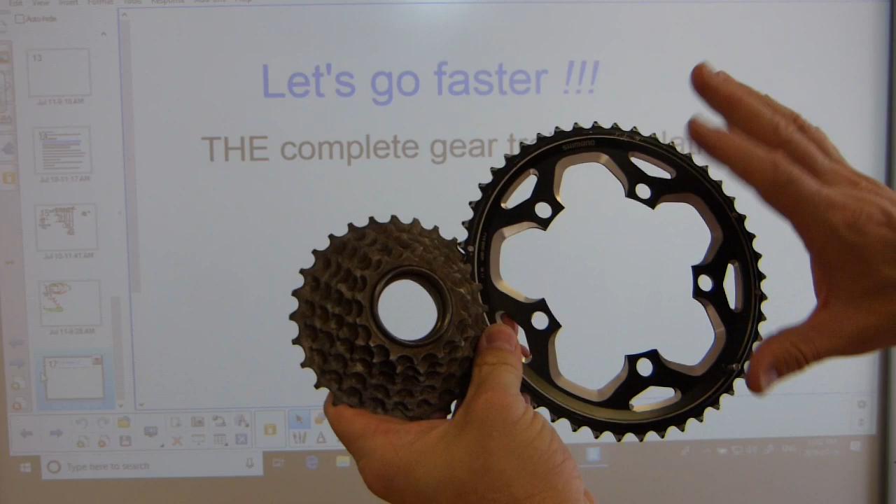Let's go faster, everyone. New chain rings and new cassette sets. It doesn't matter what type of bicycle these are mounted on. It doesn't matter if this one is a free hub or freewheel type cassette set. The math works out exactly the same way.

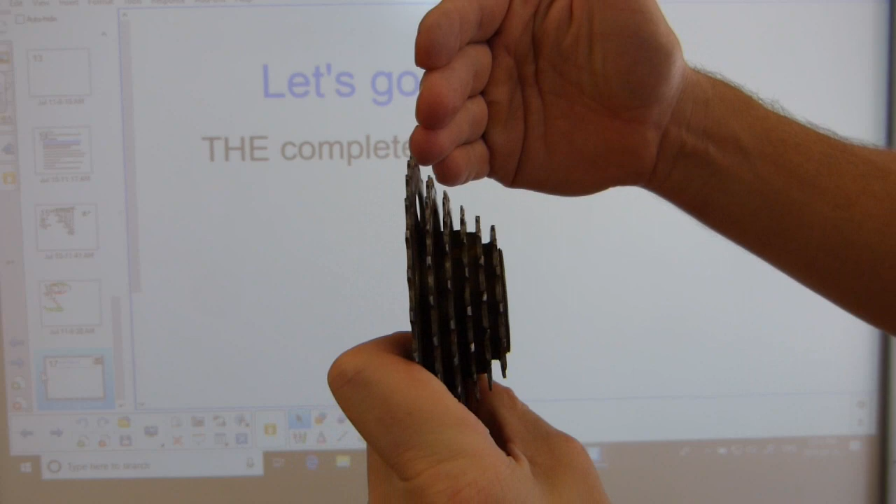In this video I'm going to show you a complete gear train calculation exactly the same way as manufacturers themselves get it done, to calculate the speed of the bicycle in every single gear that you have. Doesn't matter how many you have at the rear, doesn't matter how many you have at the front, the math will work as it's shown in this video.

The math will be in an Excel worksheet looking like this. I am going to explain what the columns mean, I'm going to explain what the rows mean, I'm going to explain what the color coding means, but this is not a tutorial in basic Excel, I'm not going to explain how Excel works.

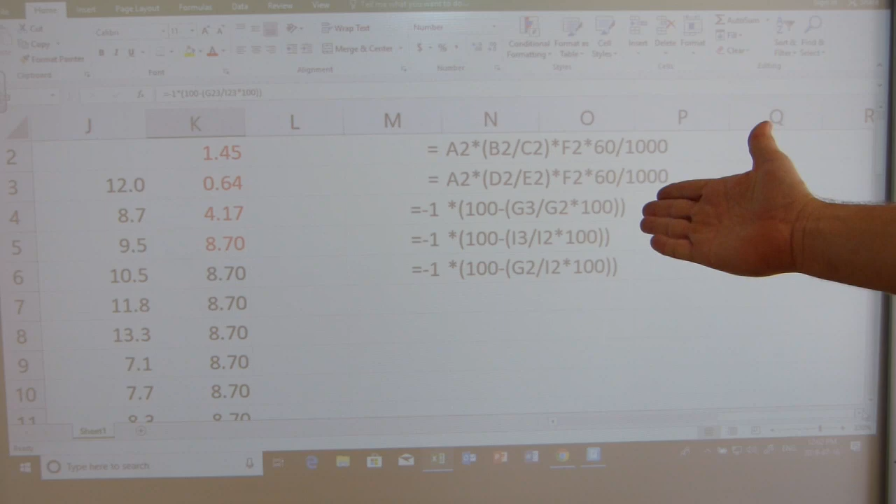Instead of writing the math out step by step, the formulas will be given like this in cell referenced formulas. That means that a formula, such as this one up top here, reads cell A2 multiplied by, that's what the asterisk is, open bracket, cell B2 divided by cell C2, close bracket, multiplied by cell F2, multiplied by 60 divided by 1000 to get your speed calculated.

It's a mouthful. I'm going to explain the concept that goes into the formula, and I'm going to explain what numbers you need to populate your table with to get the calculation done. You need 4 batches or 4 groups of information to get started.

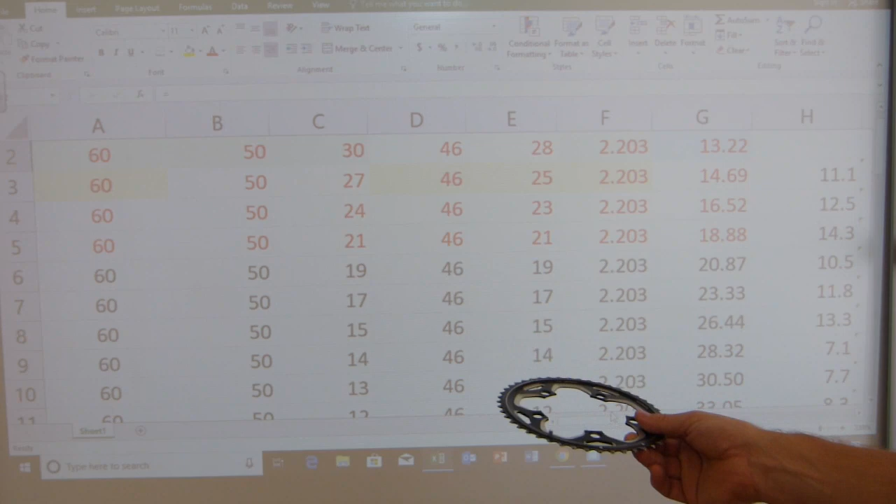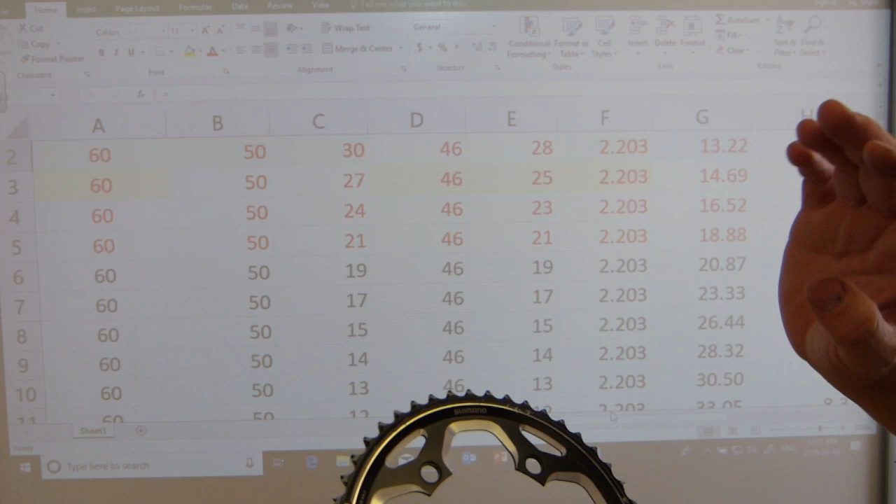What prompted this entire video is that I replaced my old chain rings with new ones because I wanted to go faster in some of the gears, and I also wanted to go slower in the climbing gears. So I have new chain rings and a new cassette allowing me to do that, and I wanted to know exactly what my speed is in every single gear and how much I'm going faster or slower in any given gear.

So let's go over what information is going into the input side of things to populate this table. I have my bicycle here set up to show you exactly that, with the gear train highlighted here with that yellow sticky. What's needed is information number 1, your tire circumference.

Wrap your tire around with a fiberglass tape measure or a steel tape measure that's narrow and lies flat on the circumference of the tire at a pressure and temperature you will be operating your tire at. So not out in the frozen cold. This one runs at 80 psi, has been measured at 80 psi, and its circumference is 2203 millimeters or 2.203 meters.

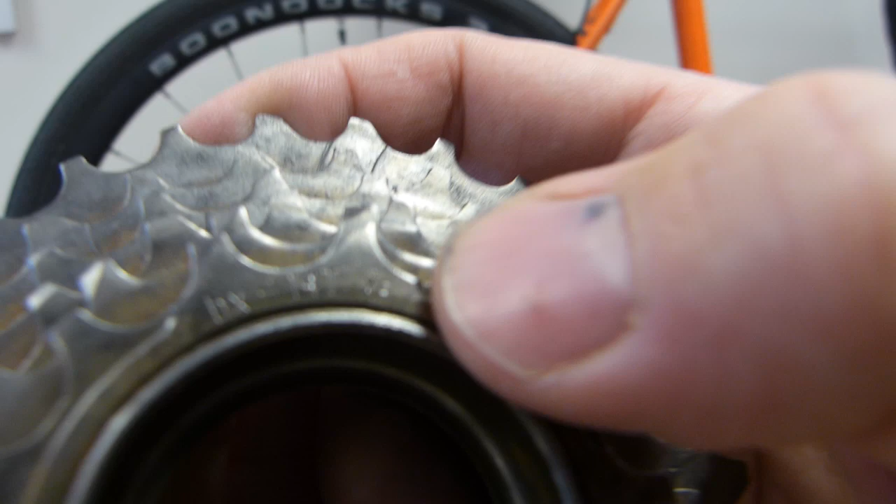The second batch of information is the number of teeth on the cassette set for every single sprocket. You can see some of the numbers embossed into it, like this one says 14 teeth for this first sprocket here. The next one is illegible. Another one here says 18 behind it, 18T, it's kind of rusty.

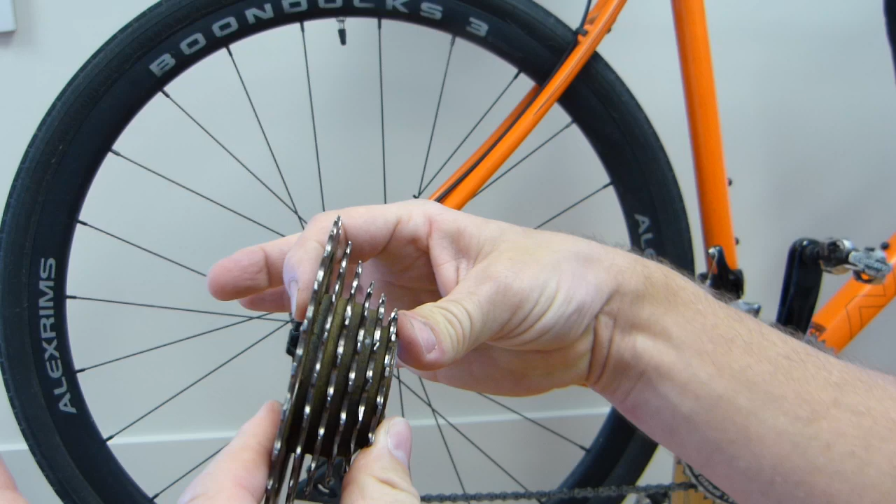So you might need to take a felt pen and carefully count every single tooth on all of the sprockets that you have, whether you have 6 or 11, I have 11 there. Whatever number of sprockets and teeth you have, you have to count them. They need to be in an Excel worksheet for this calculation to work.

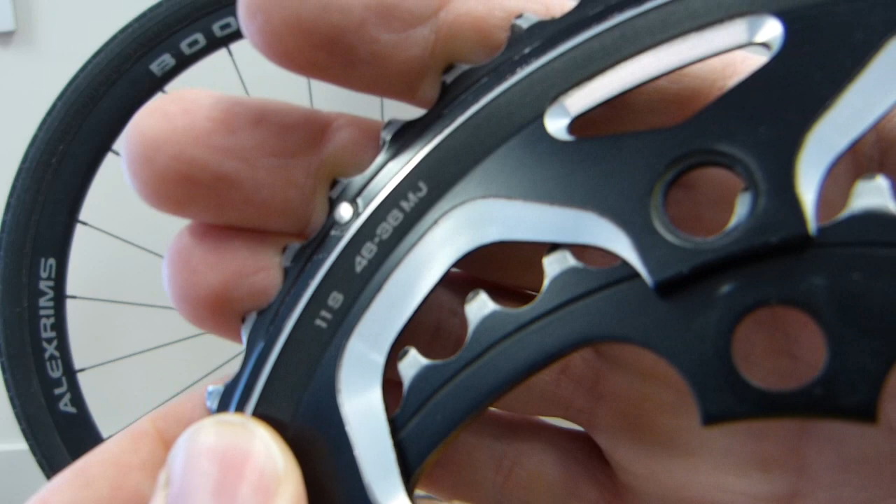So that's batch number 2. So tire, sprocket, all of them. Next one is your chain rings. Number of teeth on each chain ring, however you have, 1, 2, 3, as many as you have, all of them. All the numbers of the chain rings are also printed or embossed or engraved or somehow indicated on some of them. This one is 46 for the big one and 36 for

the little guy. On the new one here, I have 50 for the big one and 34 for the little guy. So those numbers are another batch of information going into Excel. So 1, 2, 3 with all the teeth on all of the chain rings.

Fourth batch of information is your RPM or your cadence. RPM is, if you start with your pedal in the 12 o'clock position or your crank arm, go around slowly at the 3 o'clock position, 6 o'clock position, 9 o'clock position, comes back to the 12 o'clock position. This is one revolution, one full turn. If this is all you do in a minute, that's one revolution per minute, 1 RPM.

Admittedly slow, but this is the concept. 1 RPM, one full rotation in a minute. Okay? If you're doing 60 of these in a minute, you're doing 60 RPM. I started my Excel table at 60 RPM, a very low amount.

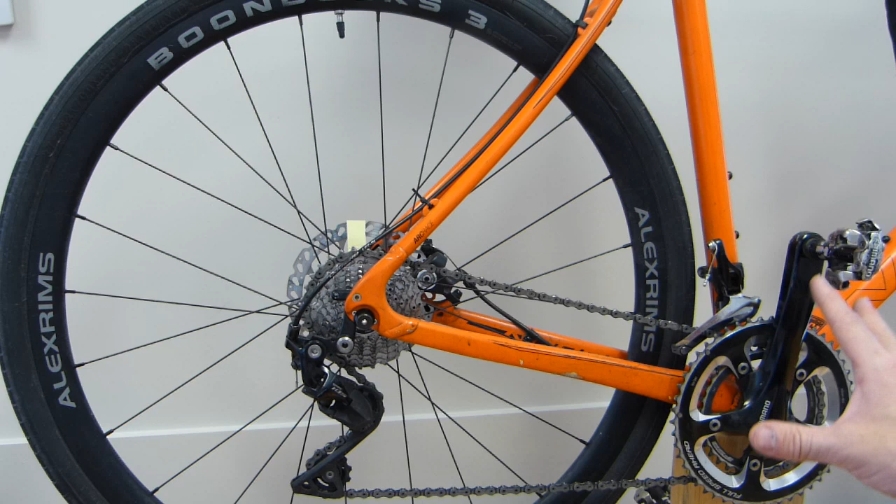If you want to do 90 RPM or 95 or whatever your RPM is, whatever your cadence is, this is the same concept as cadence, whatever your cadence is, or your range of cadences that you use, enter them in the Excel sheets. I'll show you how they work. Very straightforward. So that's the fourth batch of information that you need, your cadence or RPM number.

Now, I want to explain with this setup here. The bicycle is lifted up on this handy dandy block of wood, so the wheel is in the air. I want to show you one thing about how these 4 batches of information work together to produce speed. Speed that is a predictable, fixed mathematical certainty. It does not depend on the weight of the rider.

It does not depend on how fast the air or the wind is blowing. It doesn't matter if it's raining. This is a fixed mathematical certainty. And this is how it works. And this is why it doesn't matter how much the rider weighs.

The number of rotations on the crank arm, this is why we start here in the 12 o'clock position on the crank arm. The direct number of rotations on this one will result in a mathematically predictable, repeatable, fixed number of rotations on the wheel. Due to the circumference of the wheel, you're going to get a fixed distance traveled based on your input RPM.

So, RPM is the input. It goes through a gear reduction through your transmission here, which is your chain rings and sprocket, and you're going to get a fixed number of rotations which equates to a fixed distance the wheel travels. Again, it doesn't matter what the wind is.

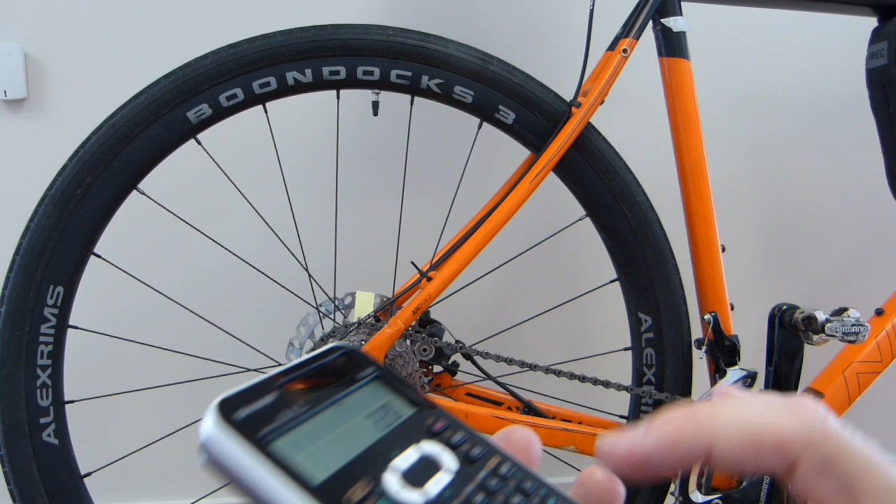That means that if your RPM is 4 revolutions, that's all you do in a minute. Say it's windy, whatever. That's why it doesn't depend on the wind or the weight or the luggage or anything. If your muscle output is 4 RPM, 4 revolutions in 1 minute, the bicycle will travel forward in this gear exactly 5 times the circumference of the tire, which is 2.203 times 5, 11 meters in a minute. Whatever that equals in an hour, times it by 60. Convert it to kilometers, that's what Excel can do for you. Very easy. So I hope this makes sense. This is a 4 to 5 ratio in this particular gear, and it doesn't depend on any other factor.

Okay? I just want to show you one more thing, that it's not exactly 4 to 5, because it's just off a teensy bit. The actual ratio, because we are on the second largest chain ring, and the second largest sprocket here at the rear, and the second largest sprocket has 27 teeth, and the chain at the front is on the chain ring with 34 teeth. The actual ratio is not 4 to 5, the actual ratio is 27 to 34.

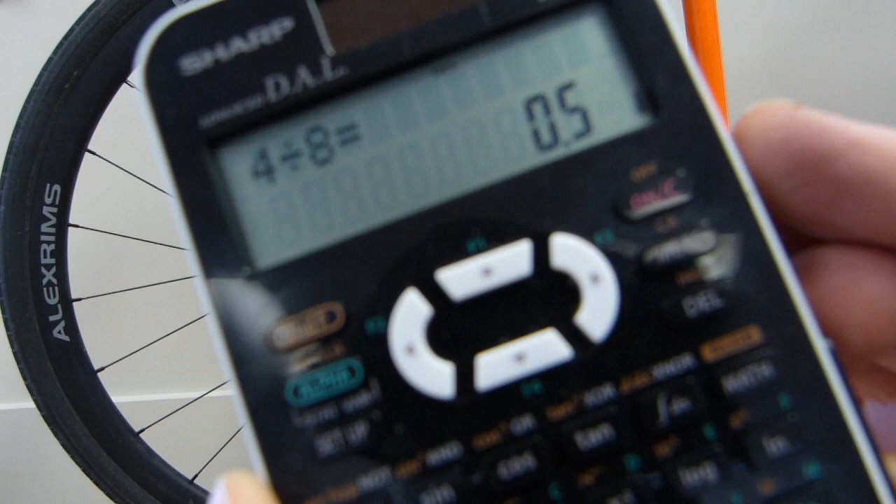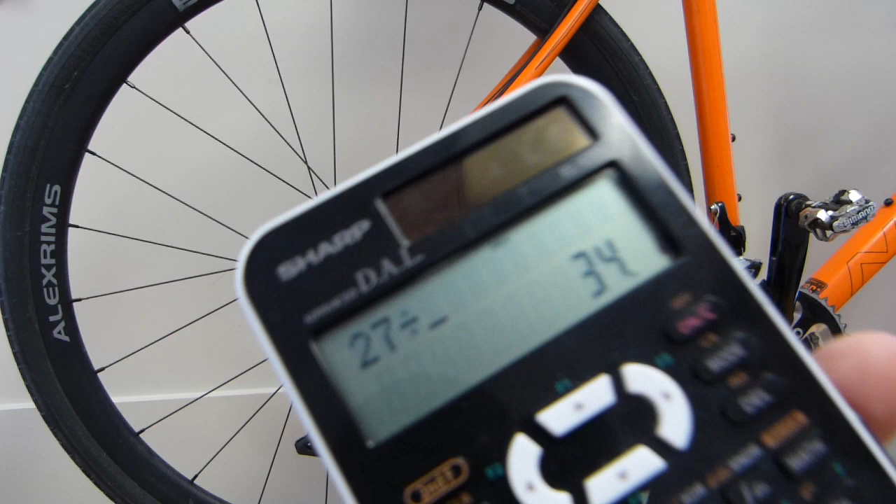Now, let me convert the 4 over 5 to a decimal here. I don't need a calculator for that, it's obviously 0.8, but 27 to 34 is a fraction that doesn't reduce to lowest terms because they don't have a common factor. So 27 over 34 converted to decimal is almost 0.8, but not quite. So that's why it's just a little bit off. It's not exactly 5 full rotations, but very nearly. So instead of the 4:5 ratio, which is good for the concept, it's mathematically an exactly 27/34 ratio. And that's why you need all of the gear teeth numbers for every single sprocket on the cassette set, and all the teeth for all of the chain rings that you have to get this math done.

Now let me change gears. I'm going to try to drop the chain on one of the sprockets that have exactly 17 teeth. Give me a sec. I think it's 3 gears down. It's looking good. Okay, let me just get this back to 12 o'clock position. Alright, when the pedal is at 12 o'clock position, the valve stem and the sticky are in the 6 o'clock position now. This is 17 teeth at the rear and 34 teeth over here. 17 to 34 is a fraction that reduces to lower terms, because 17 is exactly half of 34. So 17/34 reduces to 1/2. And this is a 1/2 fixed ratio. That means for every full rotation of the crank, I will get 2 rotations on the wheel.

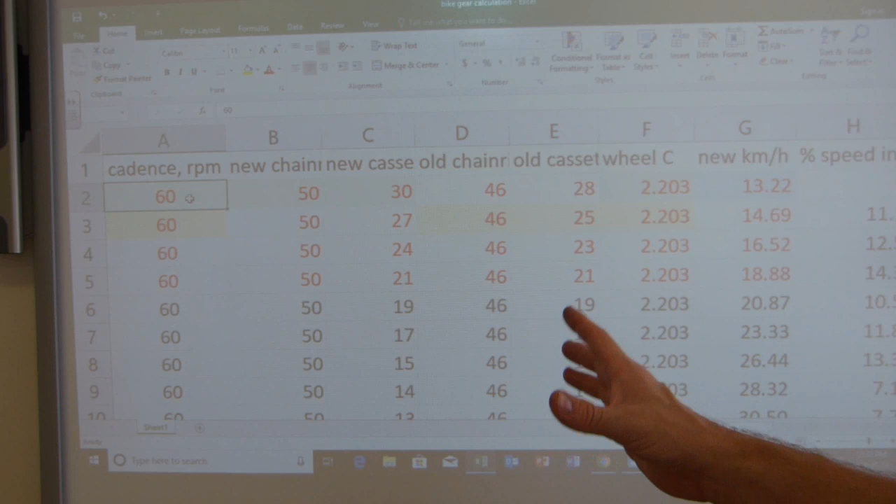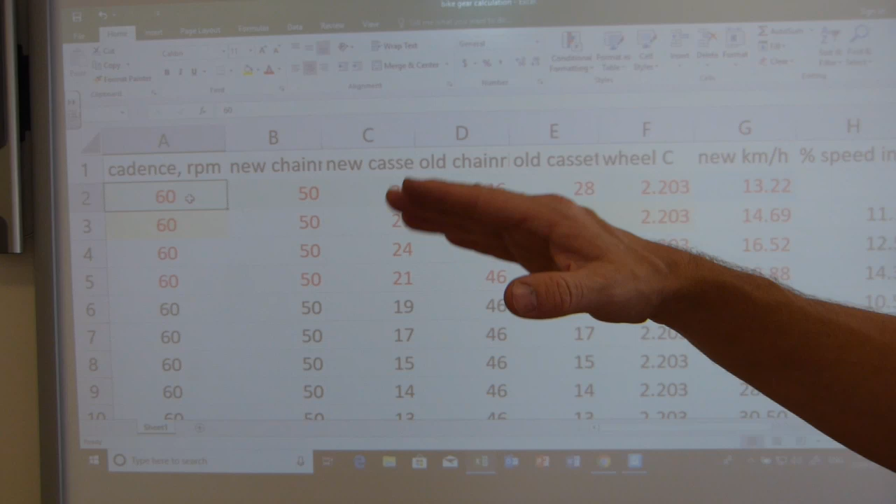Your RPM. Oh, I forgot to mention, you can measure your RPM: just pick the left knee or the right knee, how many times your right knee rises in a minute. Tick tock, so you're gonna need a watch. If you don't have any digitized or automated way to measure your RPM with instrumentation, then you're gonna have to do a count yourself. So just count how many times your knee rises when you're going at your usual pace, at your usual cadence. You will have a rough idea about your cadence.

Of course, it varies for everybody, whether you're climbing, grinding, or spinning, but it usually is between 60 and 100, just in rough terms. So that's your cadence number, the first column. Second column is my chain ring number. The number of teeth on my bigger chain ring is 50. This number 50 is entered here 11 times because I have 11 speeds, 11 gears at the back. So I have the 50 repeated here 11 times, and then the 34 for the smaller chain ring repeated 11 times.

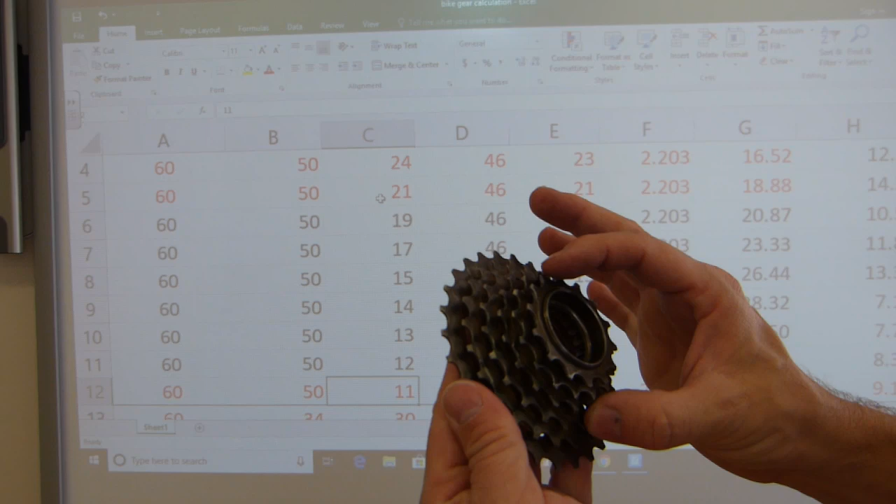In the next column, column C, I have all of the gear teeth for the cassette, for the rear. So the first sprocket has 30 teeth, the biggest one. The next one has 27, that's what the chain was on when we started with the demo. The next one has 24, 21, you can see the numbers all the way down to 11. 11 is my smallest sprocket there. So that's how this looks, and then it's repeated starting with 30, the column continues down right next to the 34.

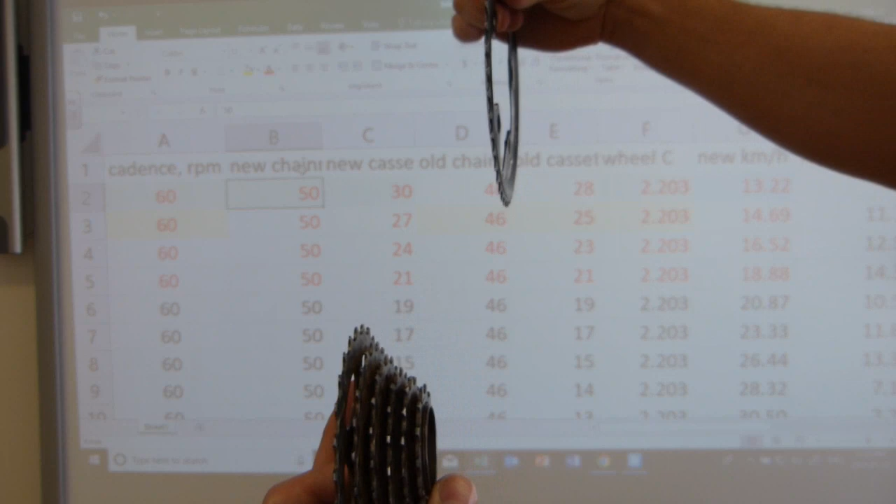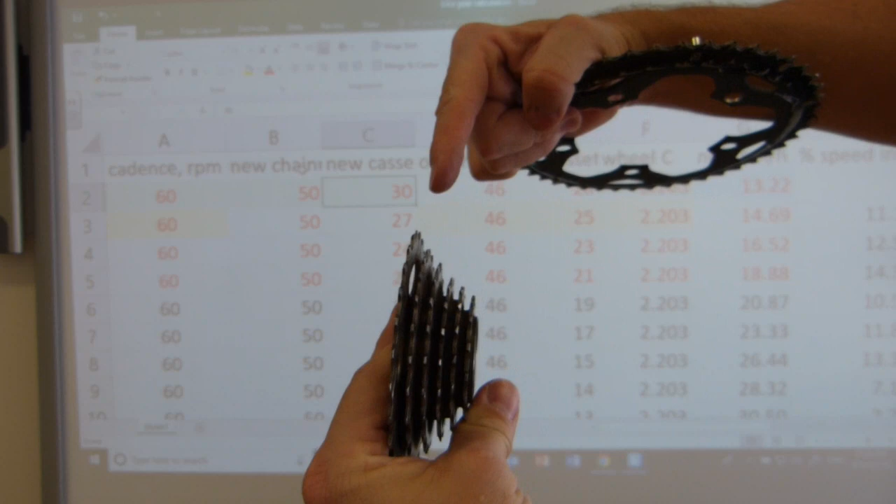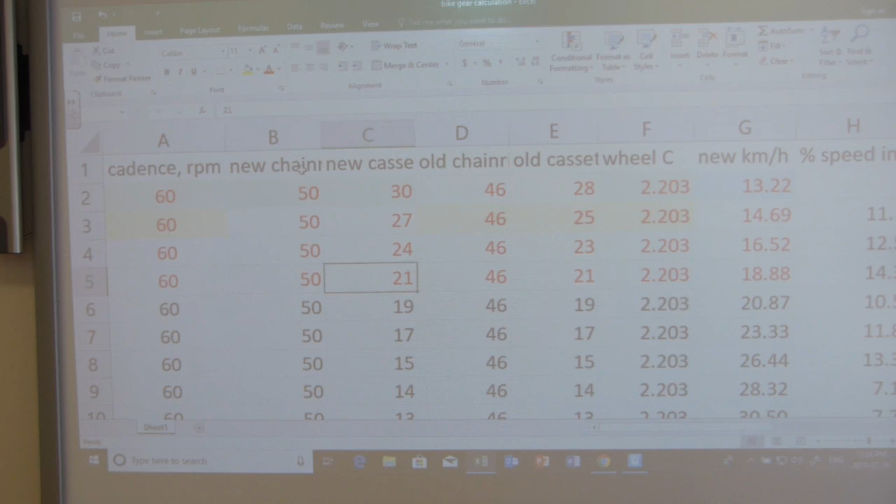The meaning of this is that the bicycle can be in gear in an arrangement where the largest chain ring, just pretend this one has 50 teeth, is connected with the chain, because this doesn't shift sideways, the chain connects the two of them. The largest of the chain rings is connected to the largest of the sprockets at the rear. So that's why 50 with the 30. Then you move the chain one down to the 27. So you have a 50 and a 27 connected with the chain. Then the 50 and the 24, the 50 with the 21, you get the idea. That's what you see here.

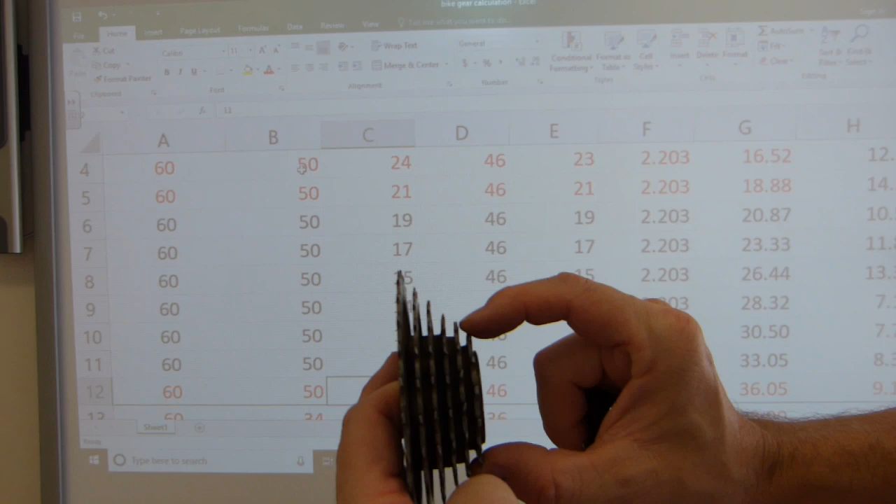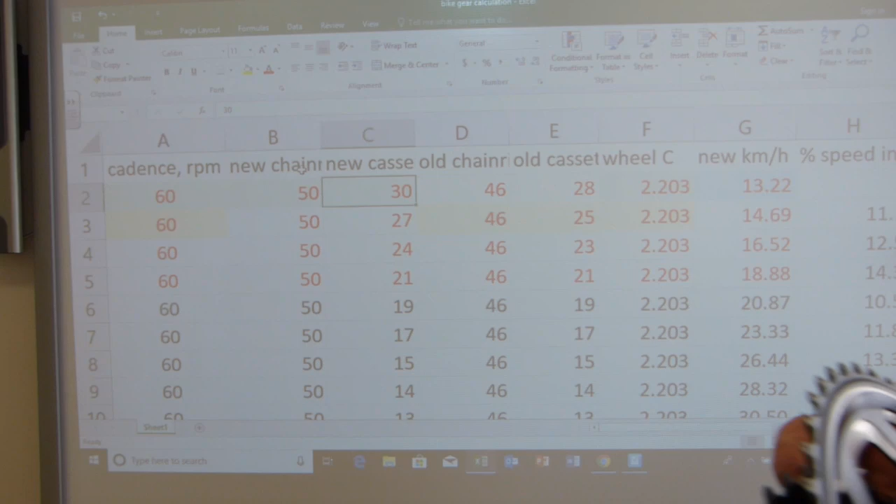Finally, 50 with the 11, the chain is on the biggest chain ring and on the smallest sprocket on the cassette. 50 and 11. Why the 50 and 11 are red and these ones are black, and then these 4 here are red, is due to cross chaining. Cross chaining means that the chain rings on a bicycle, 2 or 3 of them, are usually lined up with the middle-ish of the cassette.

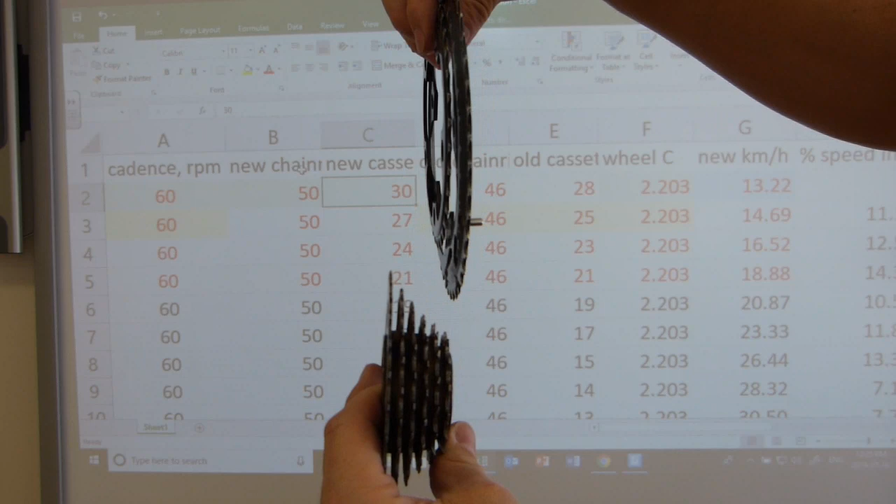So in order for the chain to reach either the smallest sprocket or the largest sprocket on the cassette, the chain needs to take an angle. So if the chain is on an angle this way or this way, it's called cross chaining, and it's not a really efficient way to run the chain.

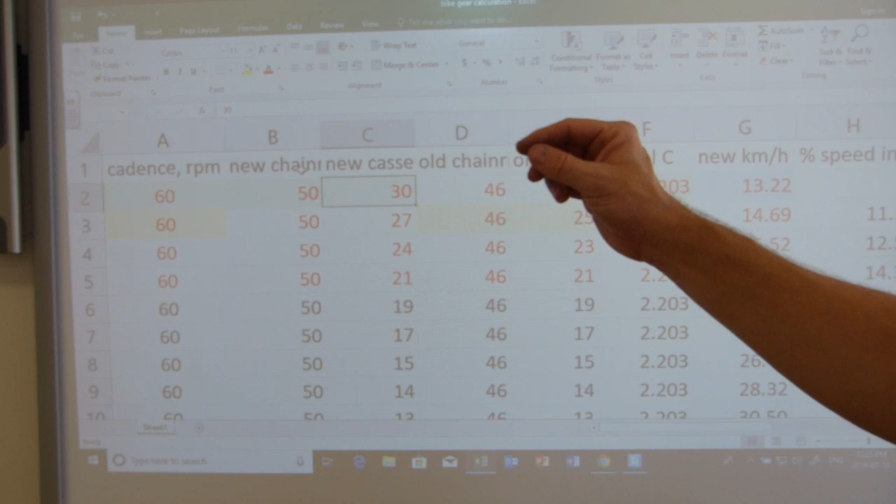Due to the added friction, it needs added power to produce the 60 RPMs or whatever RPM that you want to be going at. So that's why these are in red, because they are impractical. It's impractical to connect the biggest chain ring with the biggest sprocket on the rear. Same for these. The first 4 are really impractical.

Likewise, the fastest gear, 50 and 11, this is when the bicycle goes the fastest, but due to the cross chaining, due to the friction, it's not really an efficient gear. For designers and engineers, given the target speed that you're aiming for, the cross chaining needs to be minimized.

So the gear ratio that you want to hit, depending on what speed you want to hit, needs to be in a reasonably well aligned range of the cassette set, and that's how they design the cassette sets, given the desired speed that they want to get, without the chain cross-chaining in the process.

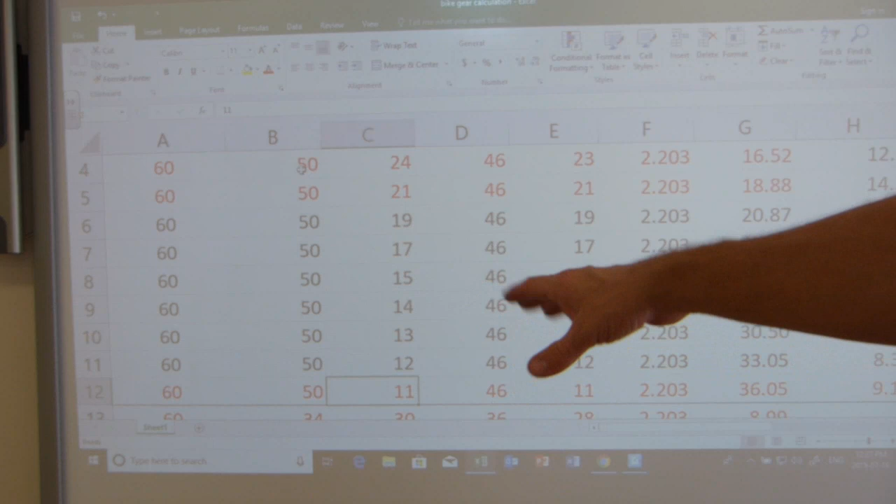So if you have to cross-chain for a kilometer or whatever for a short amount of time, sure, it will work for an entire race or a trip or whatever. But if you have to do cross-chaining for extended periods of time, it's killing time, it's making extra friction, and it's bleeding or losing time from the racer.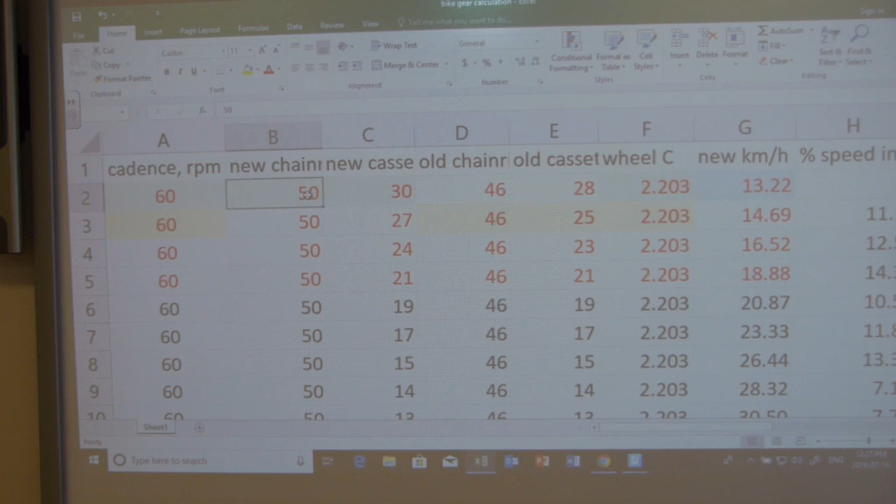Not efficient. So that's what you see in column C, the numbers from 30 to 11 with the big chain ring, and numbers 30 to 11 again with the small chain ring. The same repeats with the old chain ring, which is 46 on the big and 36 on the small. You see the 36 small got replaced by a 34 even smaller chain ring because I wanted to go slower in climbing gears. And the 46 got replaced by 50 because I wanted to go faster in the fastest gears.

So the speed is calculated here by using these four numbers: RPM, the chain ring number of teeth, the number of teeth here on the cassette, whichever it is, and wheel size, number 4, to get this number. And you can see it from the formula here. These are the four numbers in cells A2, B2, C2 and F2 to calculate the speed.

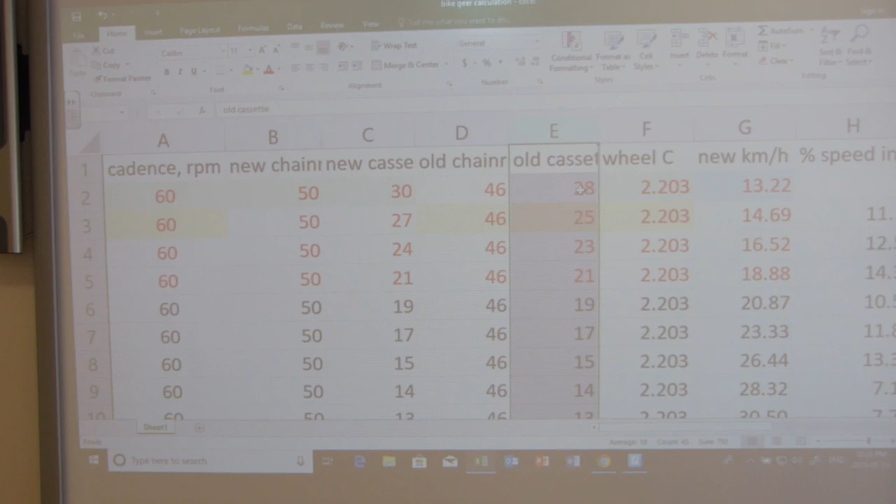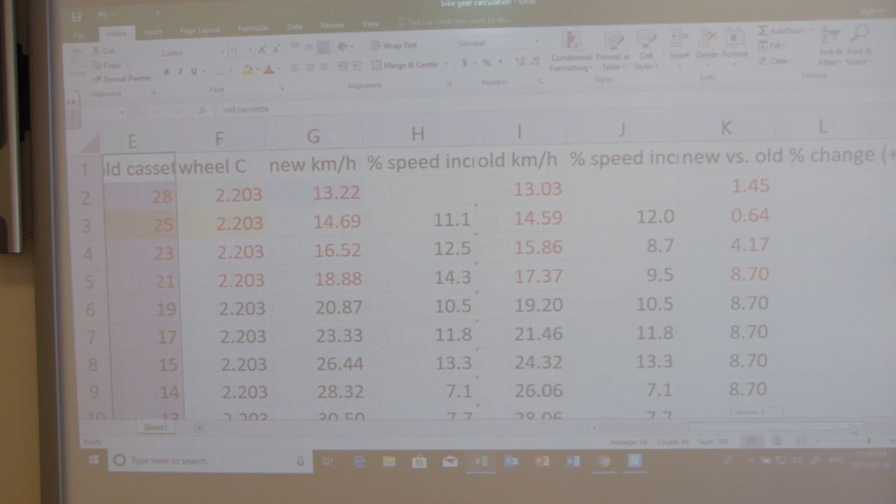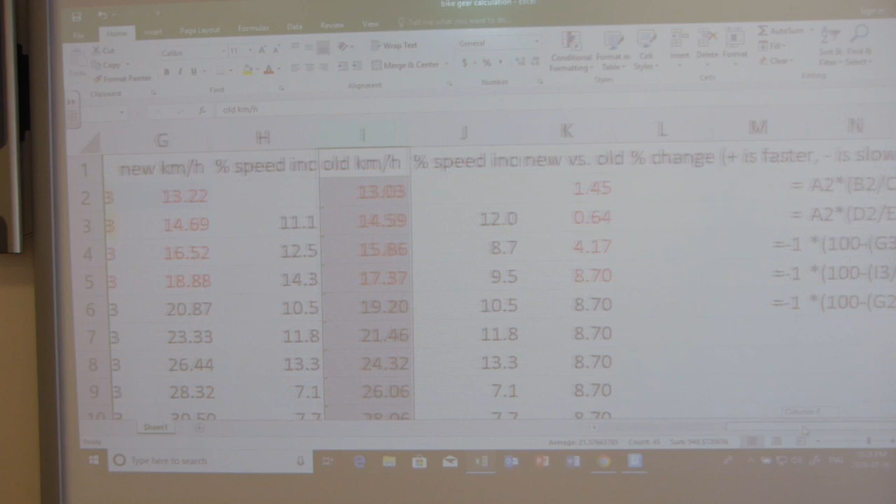The same applies to calculating my old speed with my old chain ring and old cassette. My old cassette has 11 to 28, so you can see the same logical layout, 11 to 28, and in every gear the speed is calculated. The speeds formula follows the same logic. A2, D2, E2 and F2 are referenced in it, and the old speeds are here in column I, and the new speeds are here in column G.

You can see by comparing the two that I'm going faster in every single gear with my new setup, and with my smaller chain rings in the slow gears, I'm going slower in every single gear consistently. That's what I wanted. You can see these percentage numbers. The percentage numbers are calculated within each gear within the new setup here. So 14.69 is 11% faster than 13.22.

This is G3, this is G2. You can see these percentage formula calculations here. G3 and G2 are in this formula here to get the percentages, because I wanted to know how much faster I am going in every single speed here. So about 10% faster, just roughly. You can see it's between 7 and 14.

The same is repeated in column J for my old gear train. In my old gear train I also went between 7 and 12%, about the same, 10% faster in every gear. That's nice. Or slower, depending on the setup.

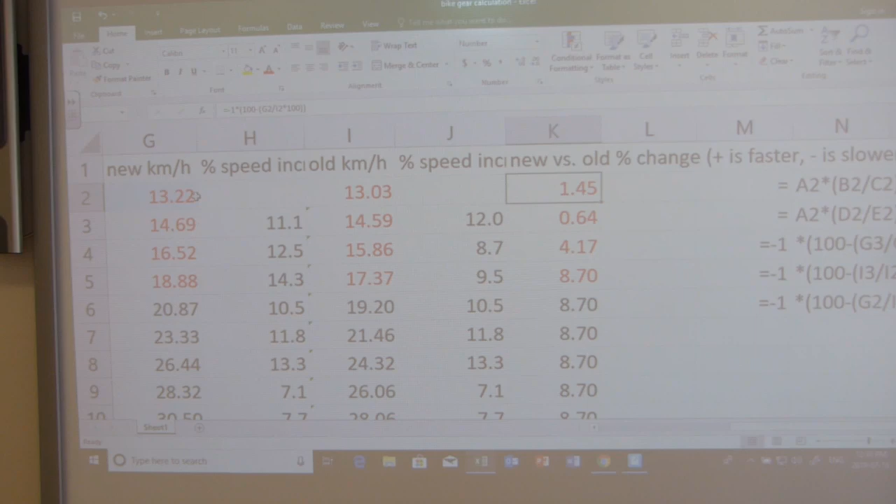Last batch of numbers here, new versus old in terms of percentage, because the speeds are, like I said, directly compared between I and G. Those are the speeds, but in terms of percentage, 13.22 is 1.45% more than 13.03. So these percentage numbers here come out of this last formula, where G2 and I2 are the cells that are referenced here.

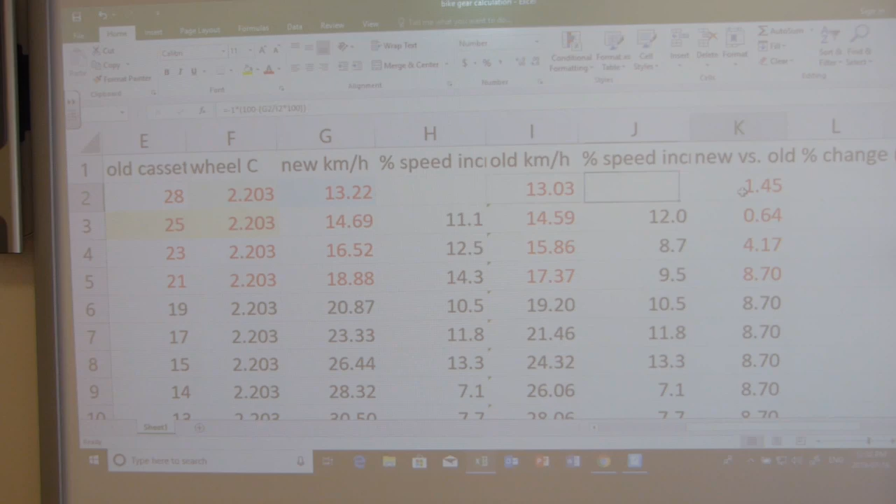So G2 and I2 produce these numbers, and you can see I'm going faster in every gear here with percentages about 8.7 where it matters, and about 5.5% slower in every gear where it matters to go slower. So I am going slower here where I wanted to, and I'm going faster here where I wanted to.

So that's what a gear train calculation looks like. That's all the thought that goes into it. You can repeat it with your numbers fairly easily if you know how to make Excel work for you. This is what goes into it.